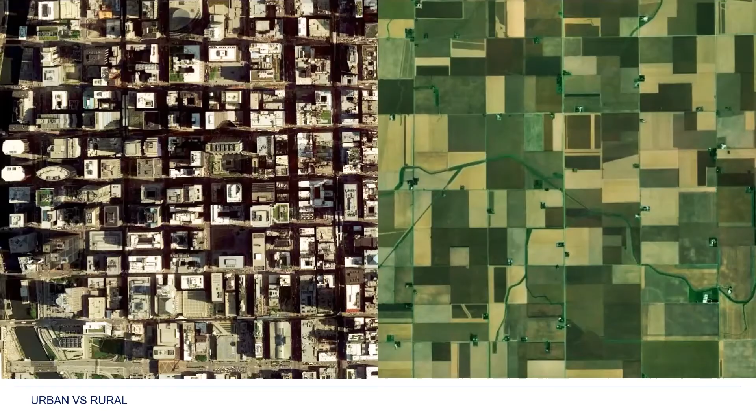In urban areas, space is limited as a result of density, while in agricultural landscapes, space is limited to maximize the square footage of crops. Space for pollution prevention and mitigation is limited in both urban and agricultural contexts. Our approach to managing water in rural and urban environments is often severed. However, the hydrologic systems that they are a part of are connected.

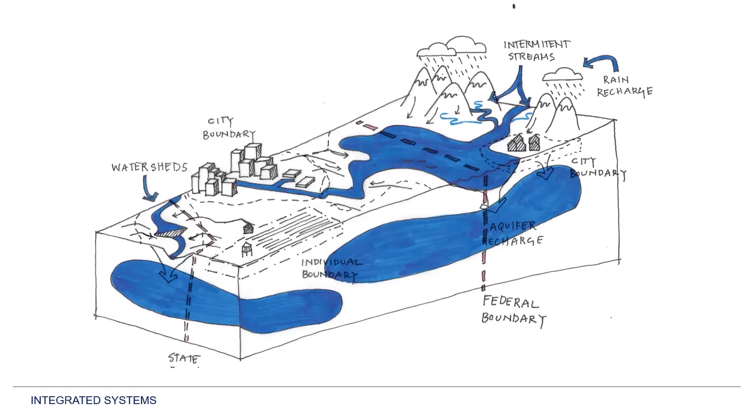The New Bolton Center is a campus, a mini city, with its own infrastructure and water management system, combined with livestock and cropland nestled within two watersheds. The landscape is productive. It's a machine, but where may additional opportunities for water management exist? First, we must understand why cities have begun to improve their waterways.

Combined sewer systems are found in 772 cities in the United States and often result in combined sewer overflow, or CSO events, where stormwater and raw sewage combine and are released into nearby water bodies untreated. Newtown Creek, located in New York City, has 22 CSO outfalls that can be triggered by as little as 1/10 of an inch of rain. Recent modeling suggests that over 1.2 billion gallons are discharged annually.

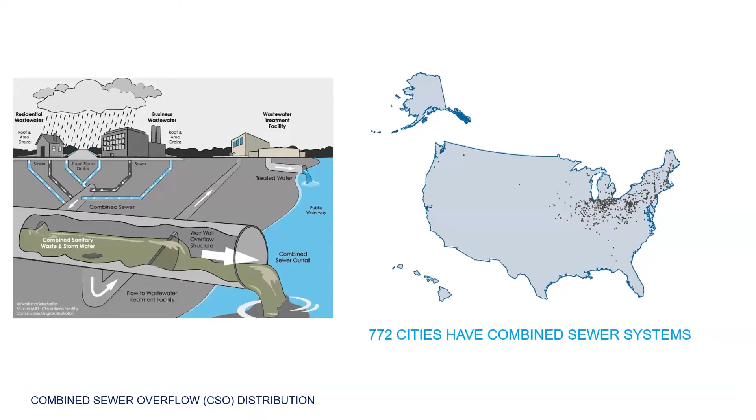The focus on point source pollution from cities can further be demonstrated by the EPA's 1994 CSO control policy and the 2000 amendment to the Clean Water Act. These called for the development and implementation of long-term CSO management strategies. As a result, the EPA has issued 47 consent decrees to communities nationally with an estimated cost of over $32 billion to become compliant. This forced cities to be fined or reimagine their water management systems.

New legislation required city and state agencies to coordinate with each other in new ways. This included the development of green infrastructure master plans, the formation of green infrastructure departments and task forces, and even new positions such as a chief resilience officer. This approach often included robust public outreach to help citizens understand the importance of these projects.

New water regulations created the political will necessary to rapidly design, test, and deploy green infrastructure strategies in cities across the country. This approach often included a plan created by departments within a city to set clear and unified goals and action items. This led to the development of pilot projects to further test viable options to meet their goals. Pilot projects are constructed, monitored, and adapted until the city sets new design standards for large-scale implementation.

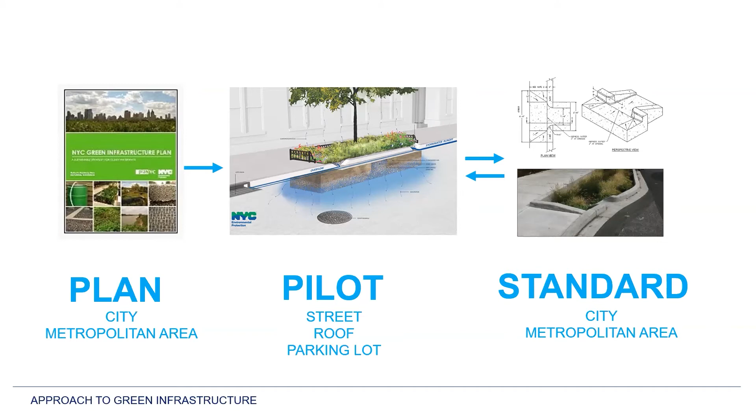The success of these pilots and standards are highly dependent on innovation from design professionals to develop designs that not only manage stormwater, but fit within the existing city fabric. The result has created new streetscapes, new and improved habitat, reduced energy costs, reduced the heat island effect, and measurably improved water quality. New green infrastructure pilot projects continue to broaden the potential of green infrastructure to adapt to a myriad of complex conditions in the city.

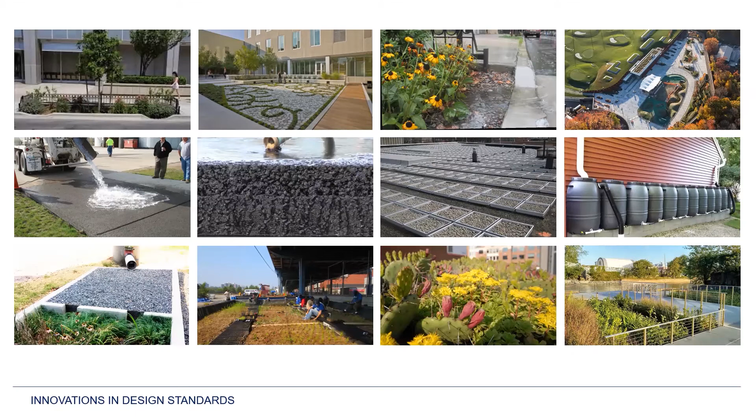Green infrastructure has been proven to be a robust strategy for reducing pollution from urban water systems. This has been an interdisciplinary effort. Teams of landscape architects, civil engineers, hydrologists, and urban planners have been at the forefront of designing green infrastructure to mitigate stormwater runoff.

The New York City Department of Environmental Protection plans to construct 2,000 bioswales that can hold 4 million gallons of water per storm event, and more than 200 million gallons annually. Bioswales are roughly 20 feet long and 2 to 3 feet wide. As an individual element within a city, their impact is unimpressive. However, the deployment of bioswales as a targeted system-wide approach has radical outcomes.

Like bioswales, there are many opportunities to hack conventional design standards to create innovative solutions. A network of small-scale solutions can have a large impact. A curb, an elevated highway, and a street end are all opportunities for innovation. These examples will illustrate how design can challenge traditional engineered solutions. Can we redesign a curb? And what benefit would it have?

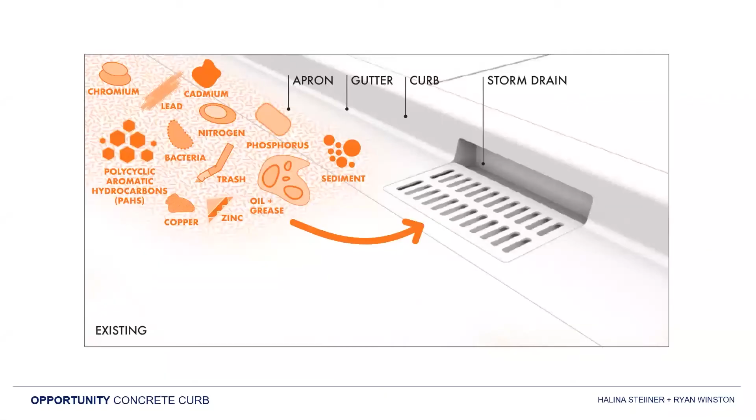A curb is a simple but ubiquitous thing. San Francisco, for instance, has just shy of 5 million linear feet of curb. The operation of a curb, gutter, and apron is transparent. They facilitate the movement of stormwater from the road to a storm drain, or more recently, a bioswale. However, this straightforward gesture carries more than just water.

Stormwater runoff transports pollutants, including sediment, nutrients from lawn fertilizers, bacteria, pesticides, metals, and petroleum byproducts, often discharging to waterways and often without treatment. Once in the waterways, removal of the pollutants, similar to that of microplastics, is challenging. Pollutants are ingested by fish, clogging their gills, and impair water quality, reducing the ability for fish to hunt for food and reproduce.

Pollutants bioaccumulate within the aquatic food chain and affect terrestrial animals and humans who consume fish and other aquatic animals. Pollutants are also found in drinking water. Although our drinking water is treated, according to the EPA, roughly 1/3 of public water systems in the US were in violation of the federal drinking water quality standards in 2016.

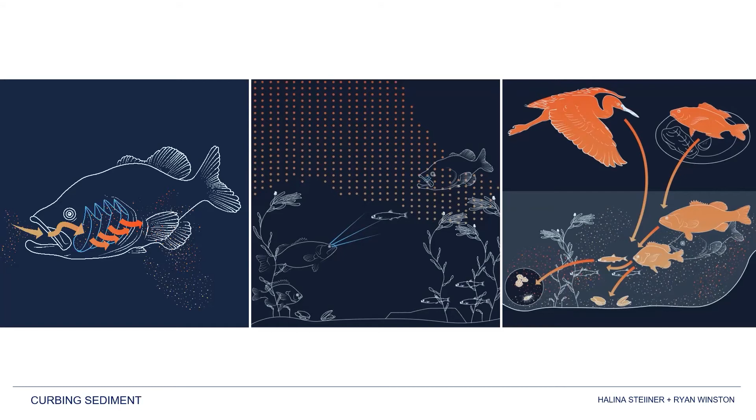Sediment also clogs bioswales and catch basins, sometimes resulting in localized flooding. A typical curb and gutter is designed for conveyance of stormwater only, and it does not provide any water quality benefit. Can we challenge the conventional design standards like the curb to do more? With widespread use of curbs, small-scale changes have the ability to have regional impacts. If we can design a better curb, one that collects pollutants before they enter the waterway, we can improve the health of our watersheds.

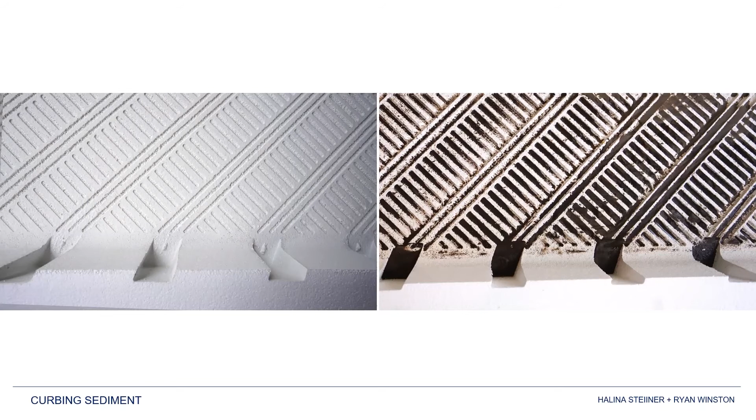A team of landscape architects and civil engineers at Ohio State University tested 21 alterations to a curb and apron. The data collected revealed that many of the designs met or exceeded the EPA's National Pollutant Discharge Elimination System criteria to become a best management practice. These new designs can be used in concert with green infrastructure to reduce clogging or independently on roadways.

Curbing sediment's small footprint can be advantageous in areas with mature trees and narrow sidewalks. Custom patterns could be developed for business improvement districts or by municipalities to adapt to specific aesthetic, hydrologic, and other physical conditions. Regular maintenance of curb, gutter, and apron designs can be performed by street cleaning machines already in use. Curbing sediment is a feasible alternative to the standard curb, gutter, and apron design.

Widespread use of new curb designs can have large-scale impacts. For example, the city of Columbus has more than 14 million linear feet of curb. If applied across the city, this could capture thousands of pounds of sediment per year.

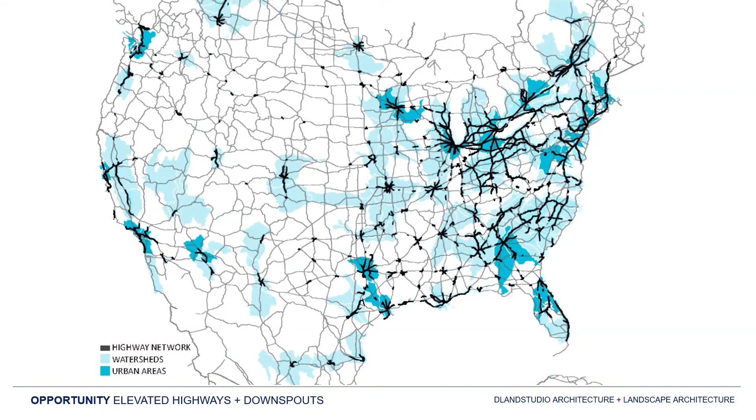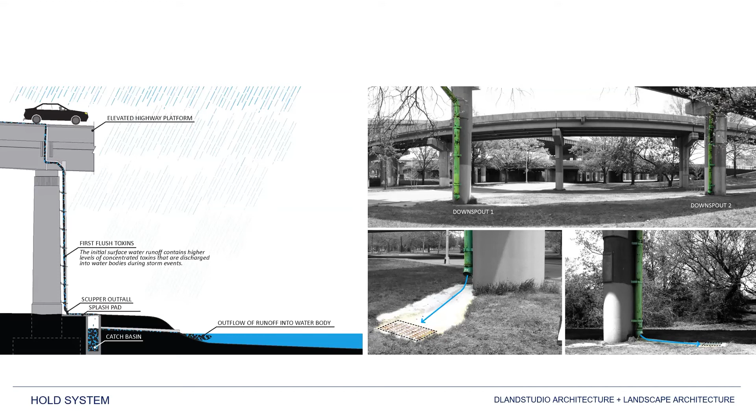Flushing Meadows Corona Park in Queens, New York is bisected by a series of elevated highways. The water from these downspouts flows into Flushing Bay, part of Long Island Sound. Modular pilot projects called Highway Outfall Landscape Detention, or HOLD systems, were developed to redirect water for treatment. Two designs were constructed, one from concrete and one from gabion.

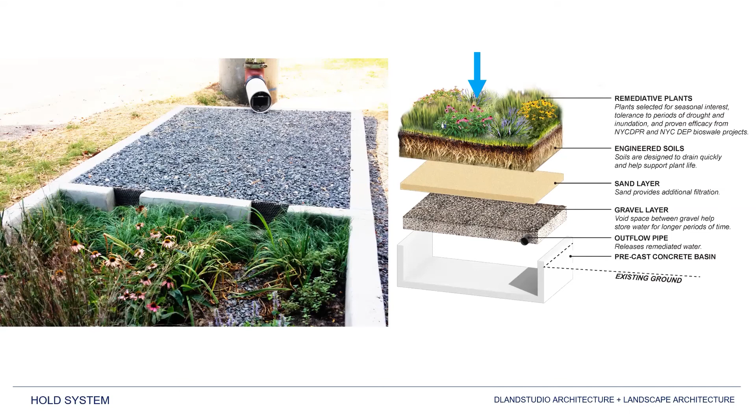The concrete model, shown here, includes a sedimentation basin to collect fine particulate matter and litter, gravel channels that carry water throughout the bed, and plants and engineered soil to treat stormwater runoff. This design can be used in an area where groundwater may be high or constructed above ground if utilities, tree roots, footings, and other conditions limit excavation.

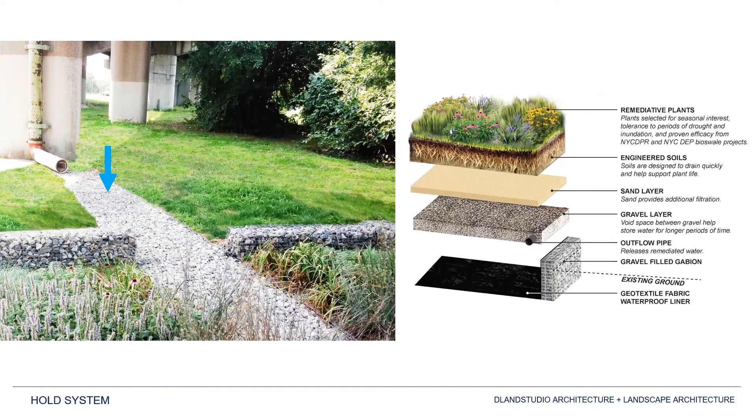The gabion model has similar interior components. The pilot project was tested with a waterproof liner to collect output sensor data. However, the module is designed to be constructed without the liner, allowing for groundwater recharge once the water has been treated by the plants. The elongated sedimentation channel allows the planting to receive sunlight and avoid shade from the elevated highway. Curbing sediment and HOLD systems respond to discrete conditions in the urban environment.

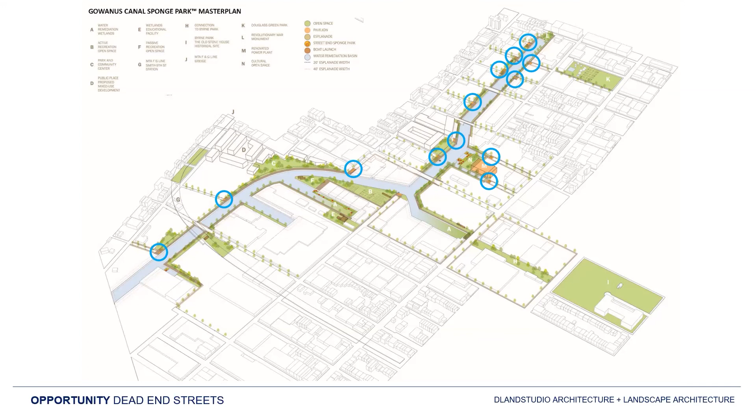What opportunities arise when you can redesign 40 feet of street? The Gowanus Canal in Brooklyn, New York was classified a Superfund site after years of pollution from industry. Today, much of the industry has left or changed course to comply with the Clean Water Act. However, canal water is still impaired by frequent combined sewer overflow events. DLANDstudio leveraged street ends along the canal, shown here in blue, to develop a modular network of street end sponge parks.

The street end sponge park occupies a city easement for navigable waterways. The easement allows for 40 feet adjacent to a navigable waterway to be used for public use. The design provides access to the water's edge, a small craft launch for the Gowanus Dredgers, a local canoe club, and manages stormwater from 2 city blocks. Without the sponge park, this water would flow into the canal untreated. The modular treatment cells allow for runoff to be treated by plants as it moves through the beds and engineered soil. The plants provide habitat for birds and insects, and the park is maintained by a local nonprofit.

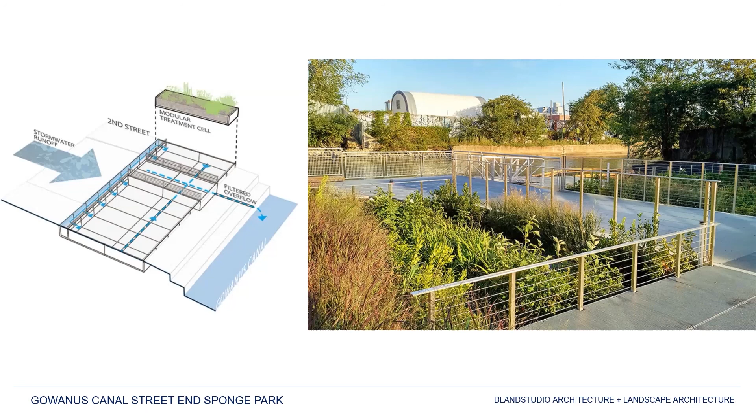The pilot project was a collaborative effort between DLANDstudio, their subconsultants, the Department of Environmental Protection, New York City Department of Parks and Recreation, the Department of Transportation, and many local stakeholders. With rapid advancement taking place in urban environments, landscape architects should consider how to leverage these successes and adapt them for rural, agricultural, and hybrid landscapes.

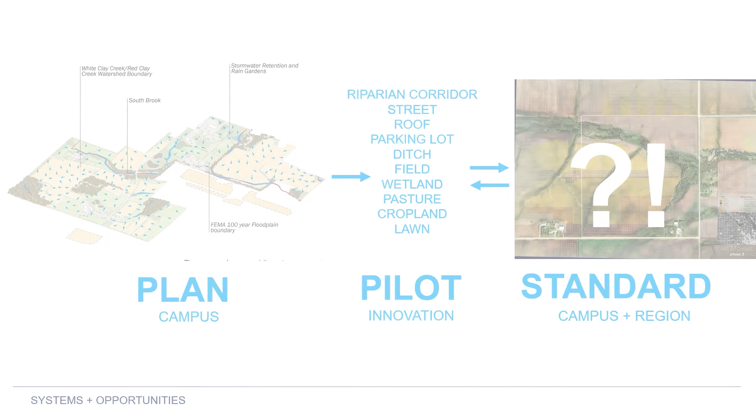The approach used by cities can be integrated into the new Bolton Center's campus. Within the campus, many standard conditions can be leveraged for further innovation. A riparian corridor, street, roof, parking lot, ditch, field, wetland, pasture, cropland, and lawn can all be asked to do more. The integration of new standards developed at the new Bolton Center can have regional impacts as visitors can see new productive landscapes. Not solely urban, rural, or agricultural, but a new hybrid landscape challenging conventional design practices of managing water.